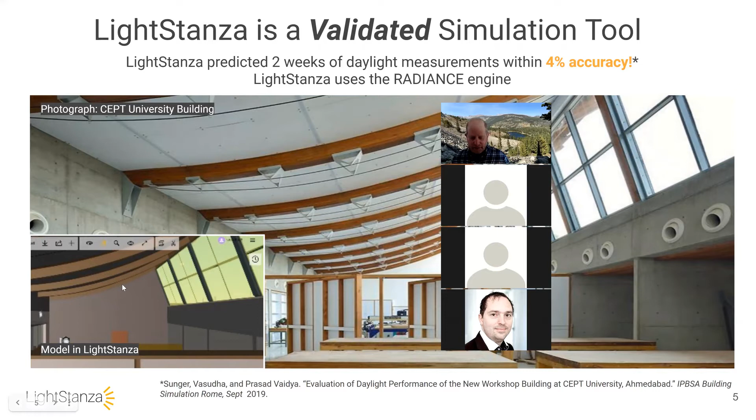I'll talk briefly about our daylight background. We use Radiance as our calculation engine, and we've had field studies to show it's very accurate. A university in India reviewed our software and modeled a building. They calculated the light levels, then built the building, and got within 4% accuracy.

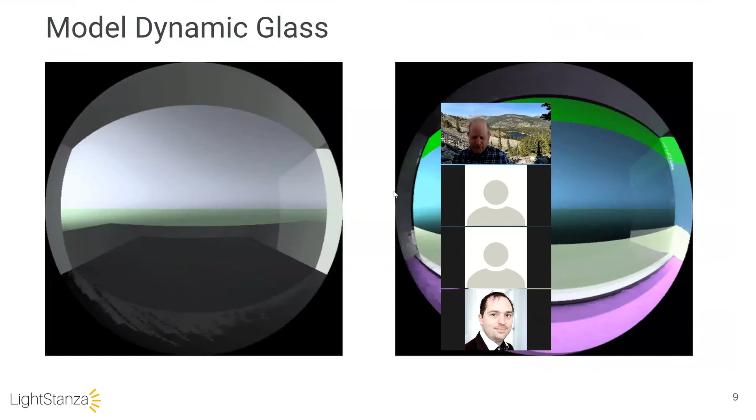In this case, you can actually look at how this glass can change colors depending on different factors of the sun. So we're interested in controls too, and this is what it would look like if you want to do a rendering for a client of the light levels.

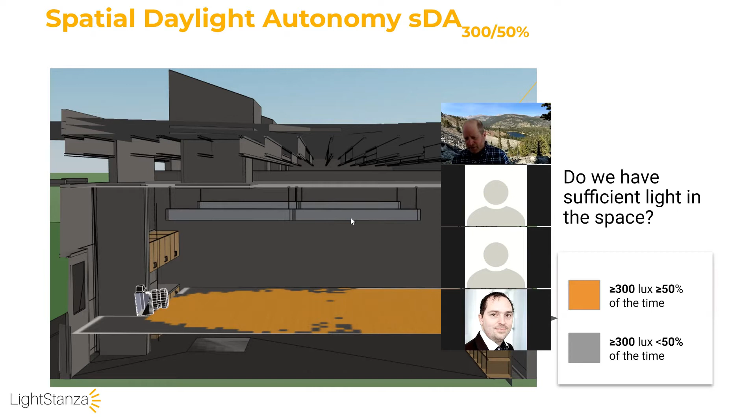We also do annual daylight calculations, which some of you may be asked for in your work. It's how much lighting can you get without the lights turned on, and that's something our software does really well. There's a European standard for this too.

Lastly, we have some things with glare, and what we use right now is daylight glare probability. We understand there are different glare metrics, and we're developing them for electric lighting, so you can really understand how painful or comfortable your environments are.

On the left is a window with just regular glass. On the right is some more cool dynamic glass. You can get plots and look at different configurations for glare.

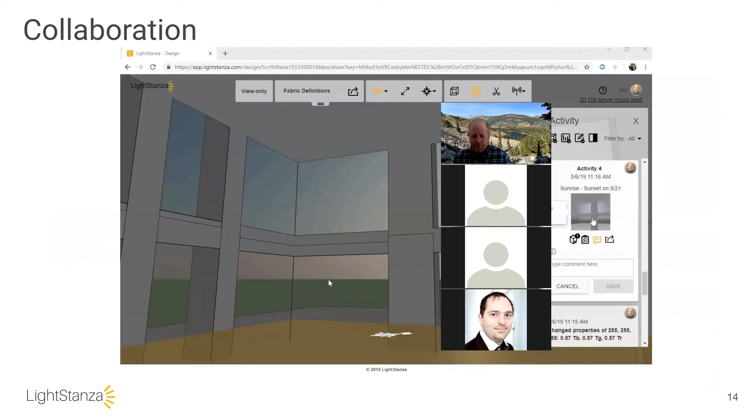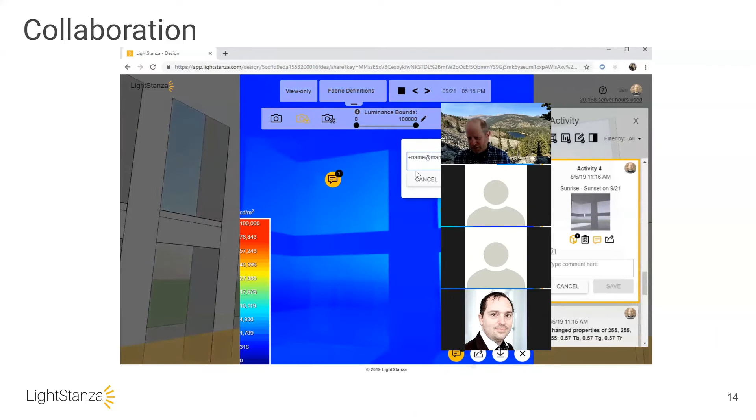Lastly, we do have some collaboration features, and I'll show you a bit about that so you can communicate either with each other or with us. To get technical support, you can just type in a message and we can get your technical message and write you back, seeing the context of it.

So I'm going to jump into our electrical product now. Are there any questions right now about the daylight? I just gave a brief overview to show you our background, and that we're really passionate about light and interested in the dynamic aspects of light. Any questions right now?

All right, from here I am going to talk about the electrical product. There are different ways to work with LightStanza. One way is to do your lighting layouts in Revit, and you can use LightStanza to run the calculations.

Also, you can do layouts online, and you can sync between the two. This is a really unique feature where if you're moving fixtures in Revit, you can have them move online and vice versa. Different people may have different preferences. Who here has used Revit or has clients that use Revit?

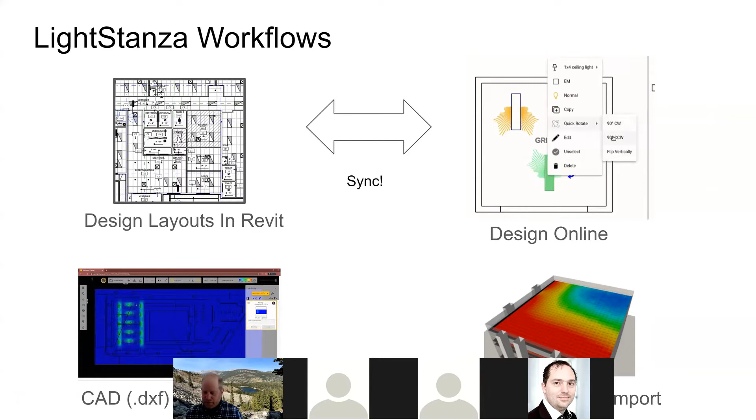Also, we work with traditional CAD workflows like DXF, as well as SketchUp and other formats. That being said, I'm going to go into the demonstration mode.

Lastly, if you're using Revit, you can do things we call prorating, where you could change your linear fixture and then have the software calculate the right photometrics for it automatically. So where do we want to start?

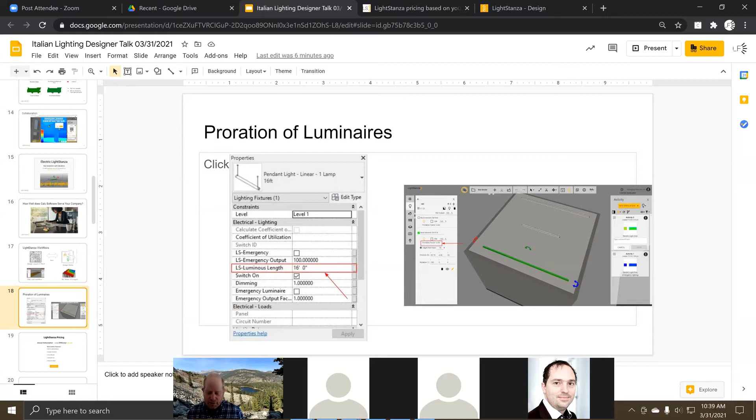Who here uses SketchUp or is interested in SketchUp? And how can LightStanza work with SketchUp? I'm just going to go over this example.

Of the folks here, are people interested in SketchUp, CAD, or Revit? Or I'll go over them all. Just speak out if you're interested in DXF, Revit, or this SketchUp workflow. It also works with Rhino.

The way LightStanza works is you want to send your model to LightStanza. This is just a regular SketchUp model with some windows in it. I also placed some calculation grids in SketchUp.

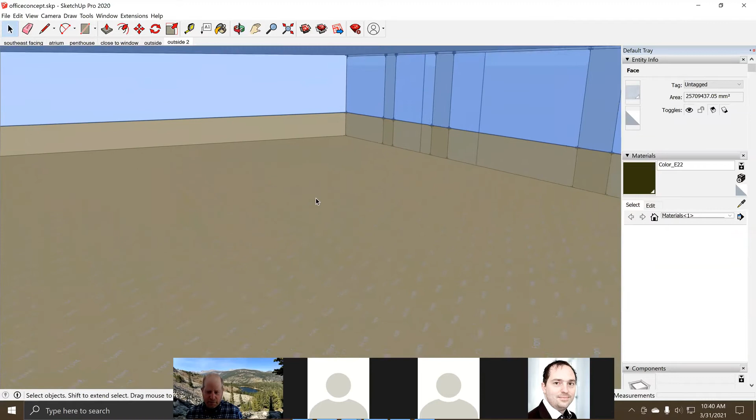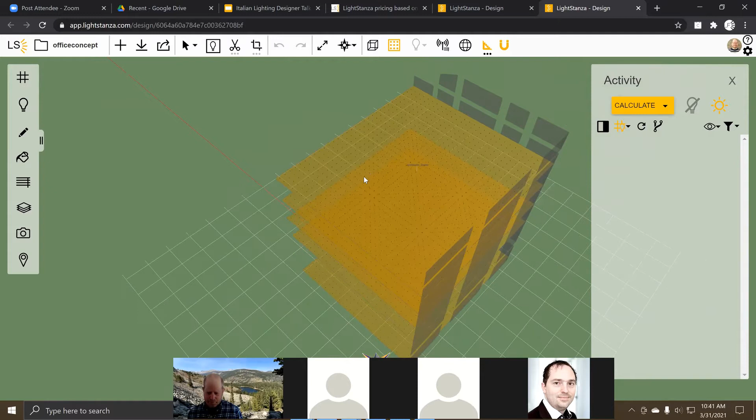To make these calculation grids, you just have to use a different material, and you can put them at whatever height you want, oriented in different ways. Once you upload it to LightStanza, you can see your model in 3D, along with the calculation grids you put in. You don't have to put them in SketchUp, but I had them here because they're handy.

Right away I can go into this plan mode. LightStanza uses some intelligence to understand that this is a 5-story building. I could go to one of these floor plans and even view it in 3D. If I wanted to, just to try the lighting, I could run a grid calculation at multiple times.

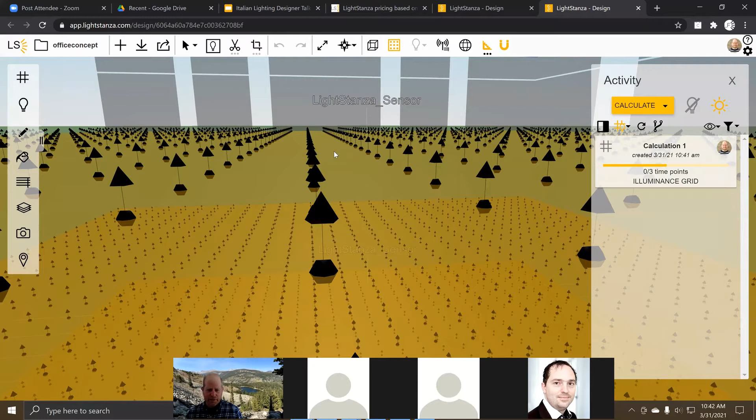There are no fixtures in here yet, but we're going to put some electrical fixtures in momentarily. I can also pull back out on this model and go outside the building, and we have a crop box we can use to make this model smaller if we wanted to.

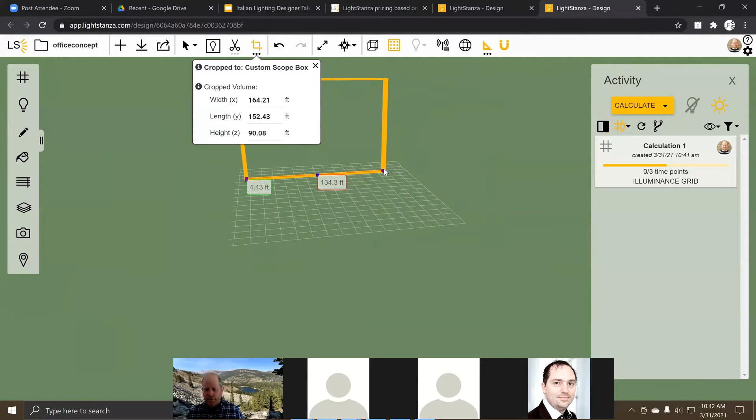So if I were to pull this out, I could turn on this crop box. And here we are - I can actually take this model. Let's say I just want to do lighting for one of the levels, so I could basically take this and collapse it down to just part of the building.

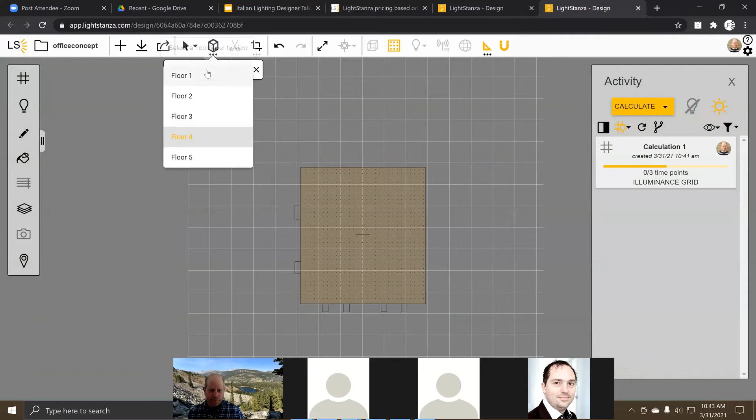Let's get the ceiling here - I want to go here. That's maybe good enough. Now if I go back here, I'm really just looking at one view of this model, and you can see the different floors and different things we're working on. But the idea is I could start doing a lighting layout in this model wherever I want.

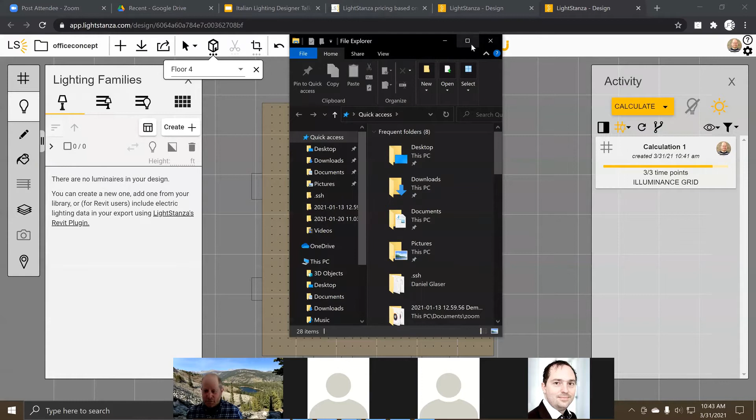To do lighting layouts, you can pick from a library and add fixtures to your library, or you can just start from scratch. If I have a folder, and I apologize, I had to reboot my computer, but if I just wanted to quickly look for some IES files, I can pick some of these - I'm just picking random IES files here - and drop them into my project here to start adding fixtures to my SketchUp model.

This isn't the right type of fixture, but you could see this in plan, and then see it over here. Let's just put on wireframe so we could see the fixtures. So this is sort of our SketchUp workflow, and you can actually start adding fixtures anywhere you want in your model.

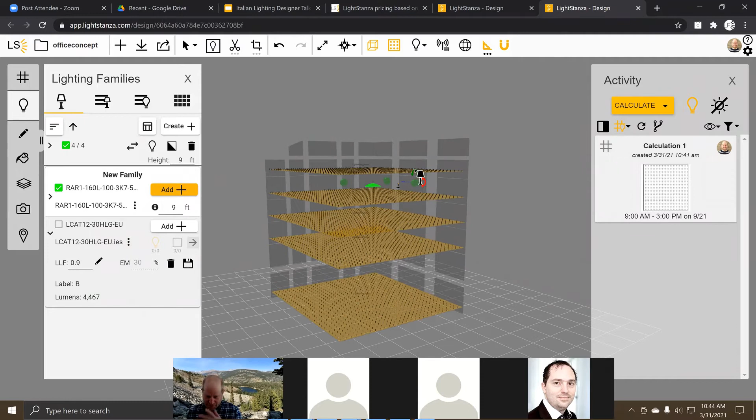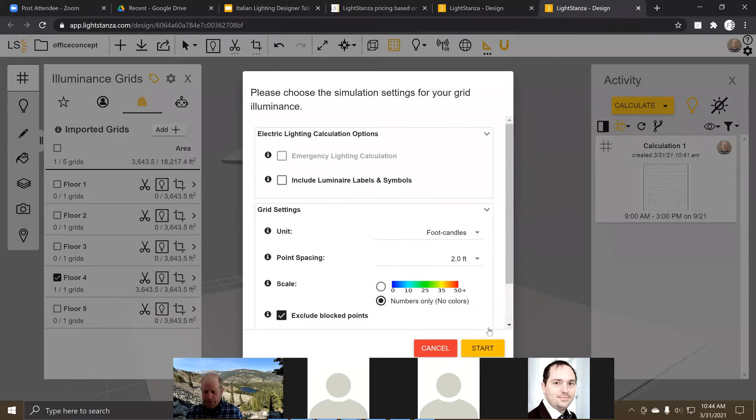If I wanted to look at the grids, the calculation grids, I can disable them all and turn this calculation grid on. Then if I run a calculation here, it's going to run it for this grid. I've also run this calculation for daylight, and you could see different results for the daylight calculation.

So once you add in a light fixture, you get the electrical part here, but if you wanted to see the sun, you can just turn it on this way. And if I wanted to do another calculation with the sun, I could just do a single point in time - maybe not multiple points - and run this. I just wanted to pause for questions right now. And yeah, these are being run in the cloud, so it's not bogging down your computer.

So these calculations, if you were working, you can come back. And if you had a question, you could say you don't think the calculation was accurate, and you could tag us at support, or it could just be like, Michael, do you think we need to add more luminaires? This is the collaboration aspect - you'll get an email, and you don't actually need a copy of LightStanza to read it.

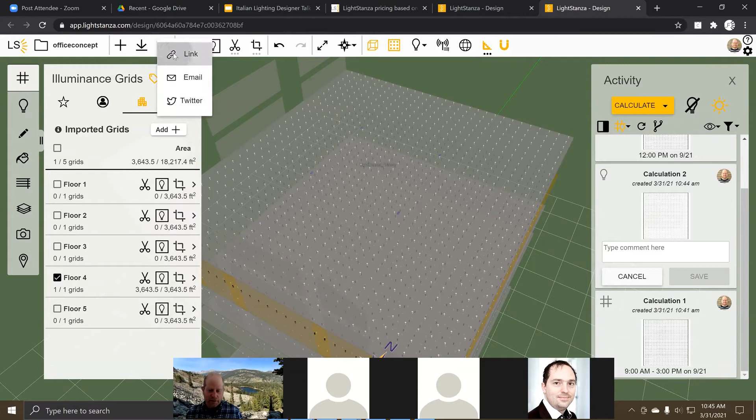For example, I'm going to give a hyperlink to this model - let me open the chat window here. I just put in the chat a hyperlink, and folks that would like to take a second to look at it, you're able to come into this drawing and see the analysis.

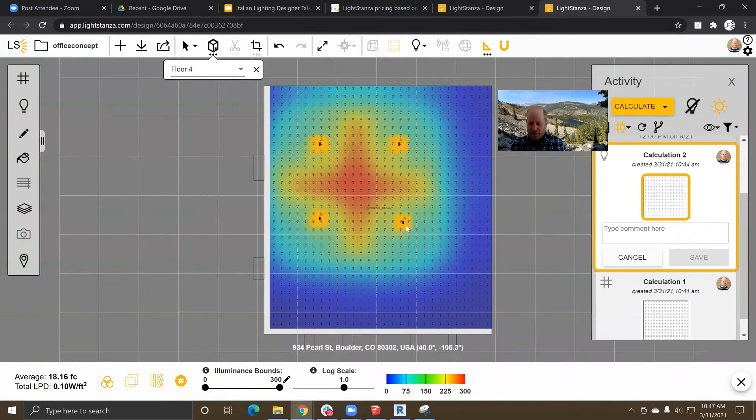This is a daylight calculation, and this is an electric light calculation. Again, this was sort of a silly example - I was just trying to show you how you could put fixtures in a SketchUp model. Then we're going to move on to Revit and some other workflows.

So this would be a case where I could just call this initial layout, and then I could type something here if I wanted to tag a colleague. Likewise, I could just share the entire drawing with someone else who doesn't need LightStanza, and the hyperlink on the chat channel you should be able to get to. So, any questions? I'm going to pause for a second.

Michael, do you have any questions right now about the SketchUp workflow and how we're able to send the model? It's a free plugin to SketchUp to just basically send the geometry over here, and then you can kind of work with it.

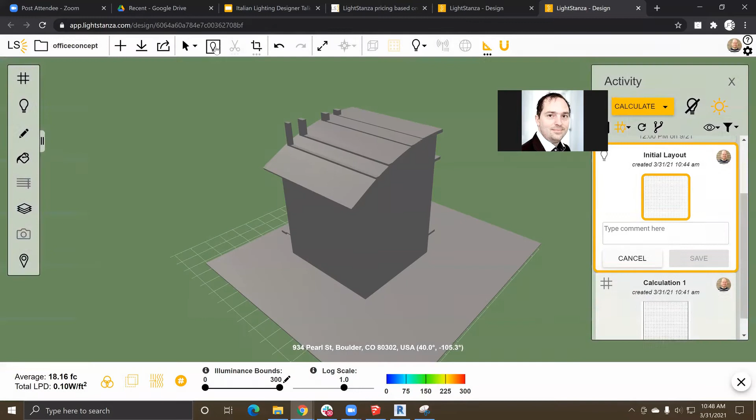I haven't seen the SketchUp workflow so far - you showed me last time something about how it works with Revit, which is similar. So it doesn't need someone to have SketchUp to work with a SketchUp model, and I can send it even to another third party to verify if I've done it correctly. And none of them need to have the SketchUp software on the computer because it's all web-based, correct?

Exactly. So this is the SketchUp model converted to LightStanza. And if you wanted to change some of the materials, you actually can here.

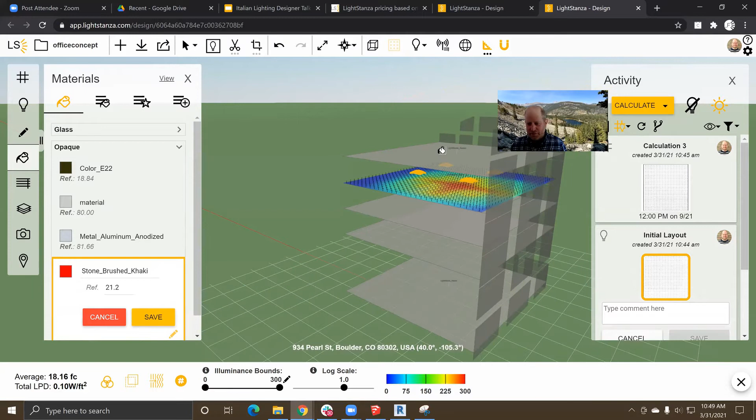So if I wanted to pick one of these materials, I can go ahead and paint it. This material is hard to see - let's find something brighter, make it bright red. Now if we go here, I think... okay, so you can do some alteration of the model where... okay, there it is - so this is the red paint. But yeah, that's the idea.

I'm just going over SketchUp. Are there any other questions about this? Otherwise I can move into Revit and show some other workflows.

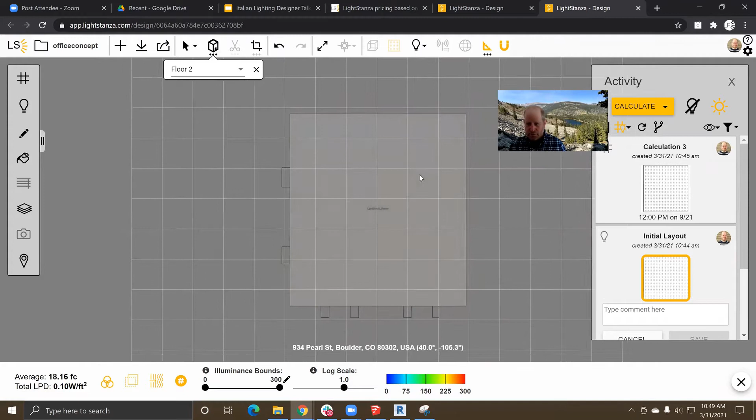I'd like to look into Revit because I think that's something which is going to be exceedingly important for us.

Okay, so here's a school in Revit, and this was done here in Colorado. This school has an initial electrical layout, but they don't have any photometrics assigned in Revit.

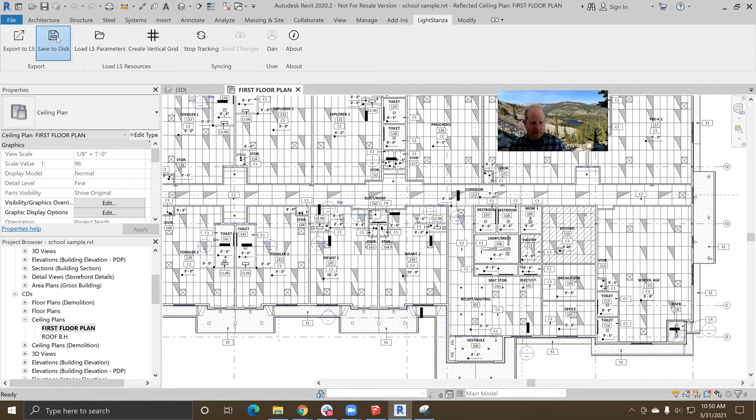So what you can do is go ahead and go to LightStanza - this is our free plugin. So if you're a lighting designer working with an architect or an engineer, and the engineer has their plan, they could either save it to disk into the LightStanza format, and you don't need a copy of Revit.

So I can save this file directly, and use the photometrics that are applied in Revit. If people have a light loss factor in Revit, you can use it, or you don't have to - you can just start with the defaults.

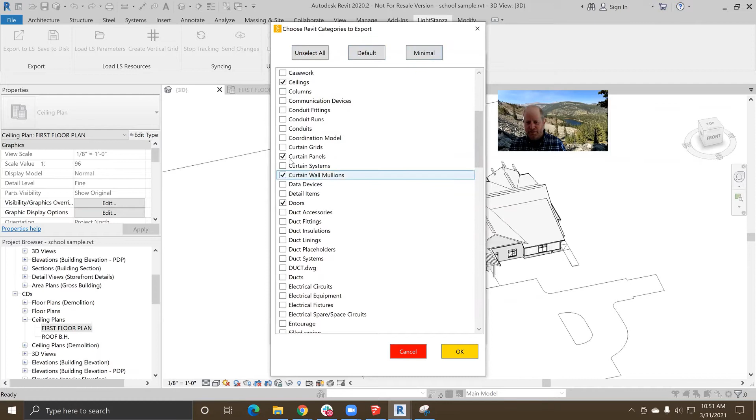You can also filter these models, because Revit models, as people know, are really filled with stuff. So you can pick the different things, select them manually after you do the upload. You can export a whole model, or if you want to make it quick, you could say I just want to do the lighting for this one space - this is like a kindergarten school. So you could pick one individual space, but I'll do the whole model.

So if I were to save this, it'll basically save it to a file. If this was an engineer you're working with, it'll save into a LightStanza data file. You could say school sample, whatever it is, and save it. Then the engineer could hand this to you, and you don't need to work with DXF or DWG. Are there questions about that?

This is one workflow. If you don't have Revit, you would ask the person with Revit to export and give it to you in LightStanza format, which is free. Are there questions about that?

If you have Revit, the more typical way would be that you export to LightStanza. You can include the electrical work or not. If you don't need it because you're doing a daylight calculation, or if you're doing all the electrical work in LightStanza, you don't need it. But otherwise we could use this. Again, you have the same options.

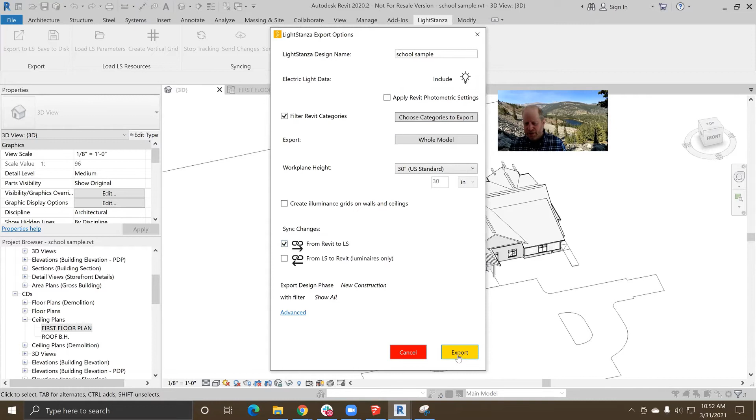And then you have this option to sync between Revit and LightStanza, so the two can talk to each other dynamically. So if I hit export here, it's now going to convert it and send the drawing to LightStanza online. This is where you can get cloud computing as well as collaboration aspects. And you can see here, it's sending it to LightStanza online.

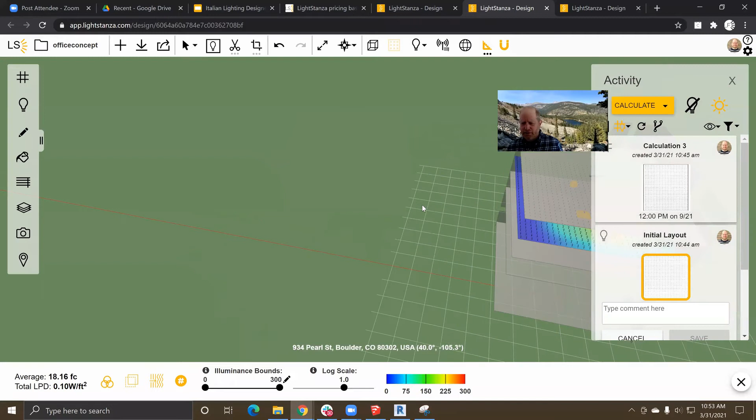Since it's web-based, you could still work on your other project while this is uploading, because you can make multiple windows of your work and work on different things at once. In fact, I could even open up a simple sketch pad of some ideas, just to show you the flexibility while this Revit workflow is running. Hopefully I'm not losing you, but the idea is that it's web-based, and you can have many copies running at once.

I can go ahead and start on some other lighting concept from scratch, or I could import a DXF or a PDF, and you can start running calculations. You can go to lighting layouts, pick different types of fixtures, and run calculations.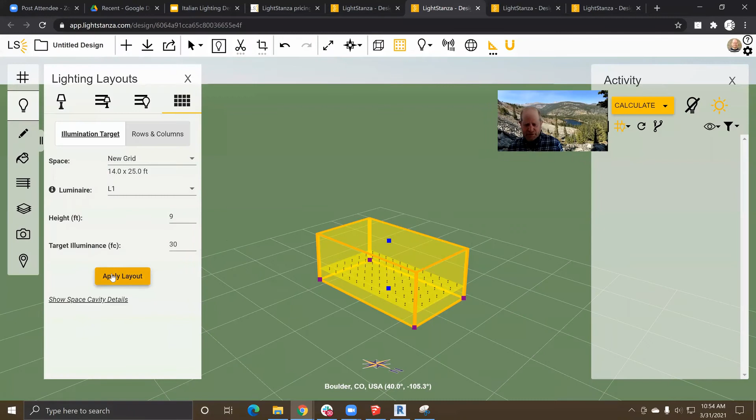Hopefully I'm not confusing you too much, but I'm just trying to show that you can work. You don't have to be held down by your lighting program per se. Are there questions about this? Michael, am I going too quickly? I was just trying to show that you can continue to work on other projects since it's web-based. Well, I knew that already, so I'm fine with that. But if anyone else has a question, feel free.

I can also ask the people in Italian. Let's see, that's going to change something.

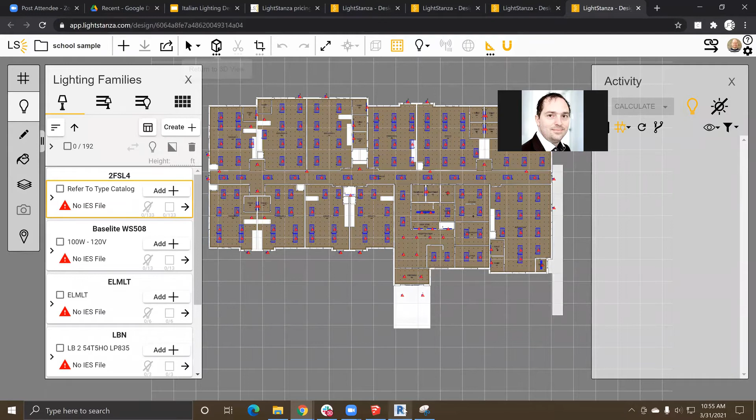Well, there seems to be no question at the moment. Okay.

So this is just a copy of the Revit model that's online. People like to have this copy because it shows a lighting designer what in Revit's actually being calculated.

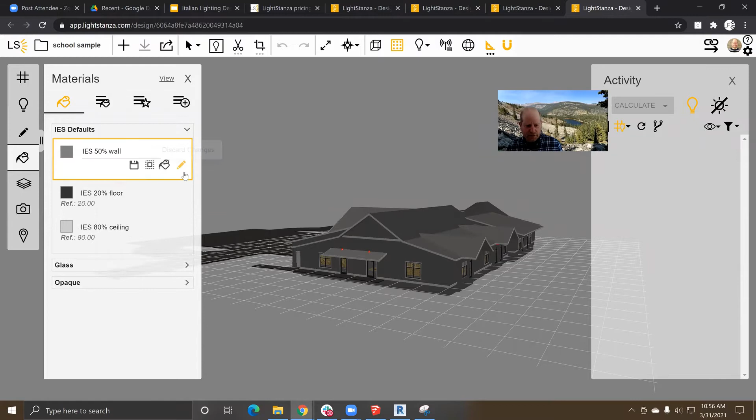We have some defaults for the materials. For example, we'll try to import all the walls at 50%, just to normalize the model so that it gets cleaned up. You can change this percentage from 50 to a different percentage if you had a different wall reflectance.

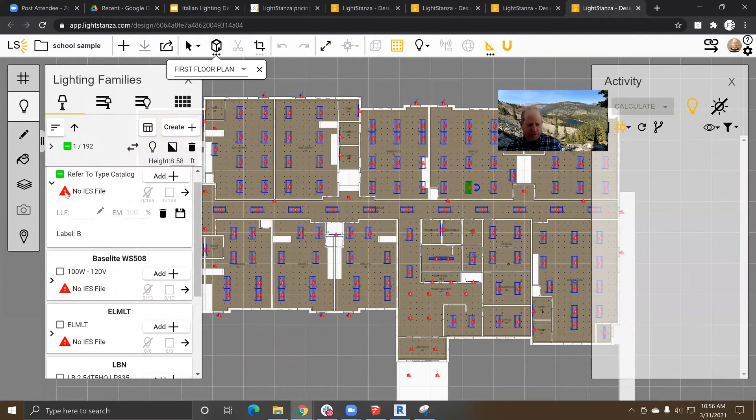Back in this view, as I said, in this case the architect put in some fixtures here, but they didn't apply any IES files or photometrics. So Lightstanza is prompting you to add a photometric file, and you can upload it.

You could use a library. Let's see what I have. Again, I apologize because I'm just picking sort of random files. I'm not really thinking this through.

And then this applies the IES files. So you could have added it to the fixture here in Revit, and it would have uploaded it to Lightstanza, or you could do it in Lightstanza.

And let's say you just want to look at a particular space, you could still use this crop tool. And I can go ahead and run a calculation.

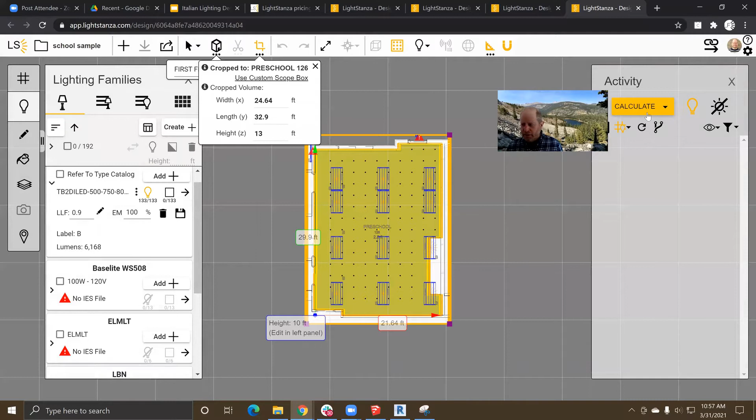The other interesting thing about Lightstanza is people will want to either do their layouts in Lightstanza or they'll want to do them in Revit.

For example, I could move these around and change them. Or I could also do something like that here in Revit, where I can go ahead and, let's say, move this fixture in Revit or delete it.

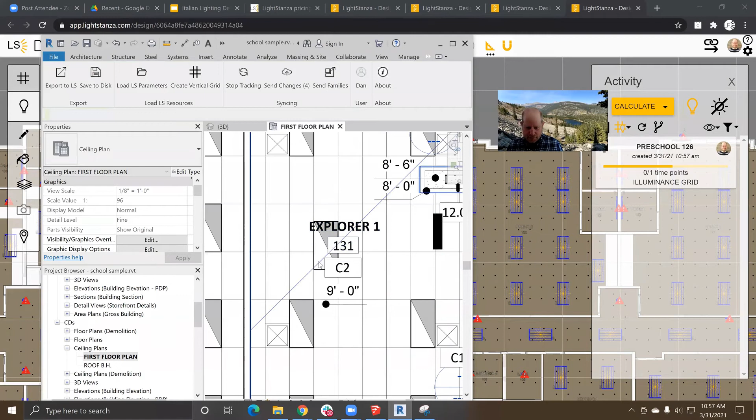So if I were to move this fixture, and let's say I were to delete this fixture, okay, so I'm editing these fixtures, and let's say I'm moving these around. What I could do is if I go back to this Lightstanza tab here, I could send my changes, and it will just send those 4 changes. And then what happens online is we should see these things move, and you could see them over here.

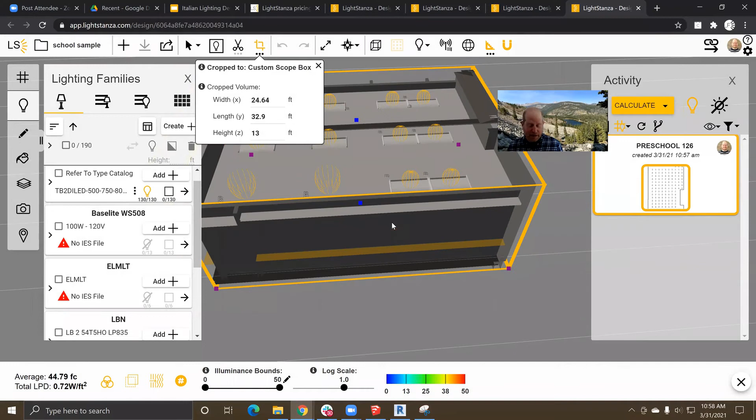So see how these fixtures moved? Are there questions about that? So this is one way of working in Lightstanza where you can change your fixture layout in Revit and have it update in Lightstanza. And then you don't have to re-upload the entire model.

So that's what I was showing here, that I moved these fixtures, and you can just send the changes, or you don't have to send the changes, but when you're ready, you can just send them again, and then that fixture will move again. So are there questions about that? So here you can see the fixture went back. This is the result of the other one here. There's a lot of light here.

And if you wanted to, you could send information back into Revit. And so if I were to look at this report, I can actually send some information back into Revit. So for example, Lightstanza could send the schedule information back into Revit. And so I can hit this OK. It's sending back both the fixture schedule, what we see here, as well as this calculation schedule.

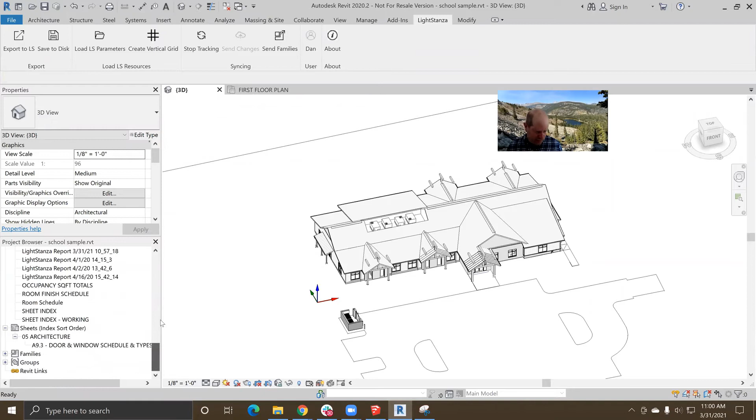And then inside of Revit, you can see that we have these different reports that are being populated inside this model in Revit that came from Lightstanza. So that's one primary way that people can use Lightstanza, is they can send information back that way. And likewise, you can do fixture layouts in Lightstanza. Are there questions so far about what I just showed?

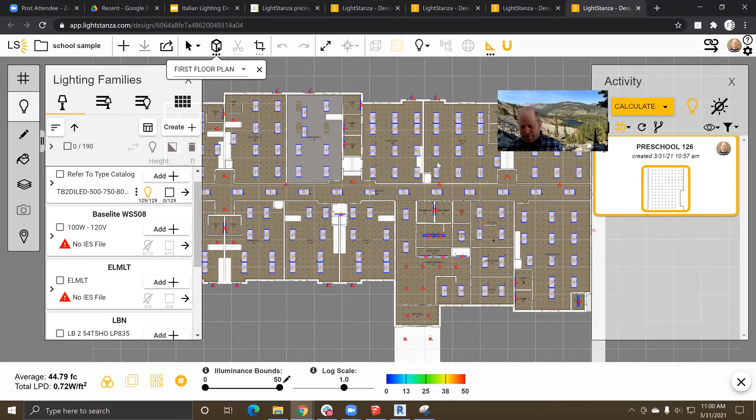Just that one, you can import Revit models. And the other thing is you can make changes in Revit, send them to Lightstanza. And what I'll show next is how you can work in Lightstanza, which I think many of you may want to do. Are there questions right now?

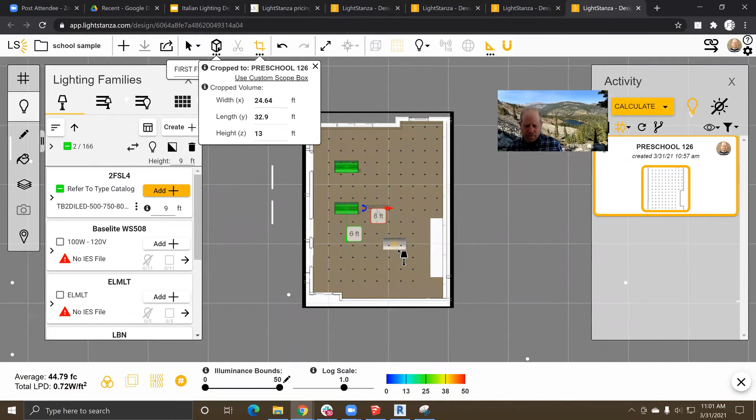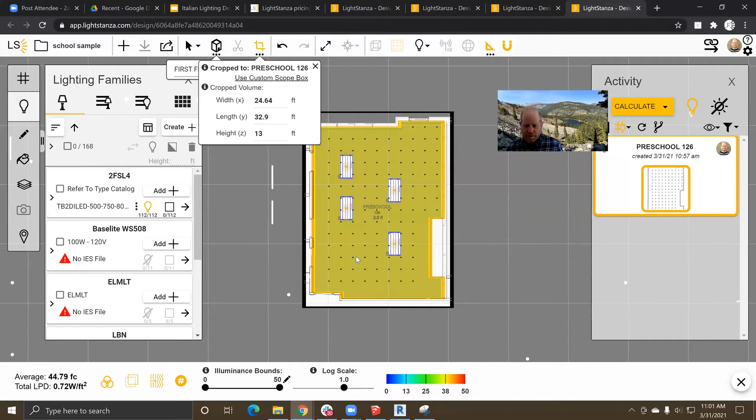Okay. So the other thing you could do is, if you don't have Revit and you get a Revit model, you could just do your fixture layout right in Lightstanza. And so here, you can just go ahead and do a regular layout too. And if you like, you can rotate these. So you can also do your calculations in Lightstanza, and I can crop to this space, or it is cropped here, and you can run a calculation with no luminaires from Revit, just from Lightstanza.

So generally, people will work in Revit for the layouts, or they'll work in Lightstanza. They typically won't do both, which is what I'm demonstrating now. You typically won't want to do your editing in both places, because it can lead to some synchronization issues. So are there questions about this Revit workflow so far?

With Revit, you can just import the file directly, you get all the 3D geometry, and in this Revit model, you have all the spaces that the architect set up to run calculations on. And if you wanted to make your own grid, you can do it inside Lightstanza. You can make your own grids online too. And if you don't like this grid, you can make it inactive. And then you can just work with this other grid here. Are there questions about this?

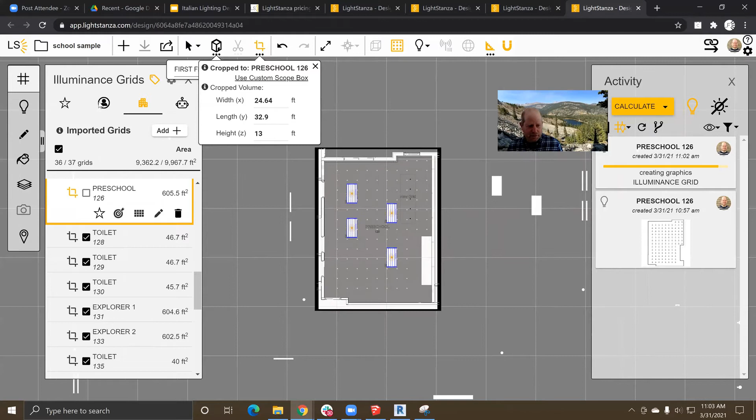I think it is new. So to me, there are many new things, and to the others there are probably even more new things. So it's quite impressive how things are moving forward. And I received a message through another channel from someone for you as information. Just go ahead. It seems to be of interest.

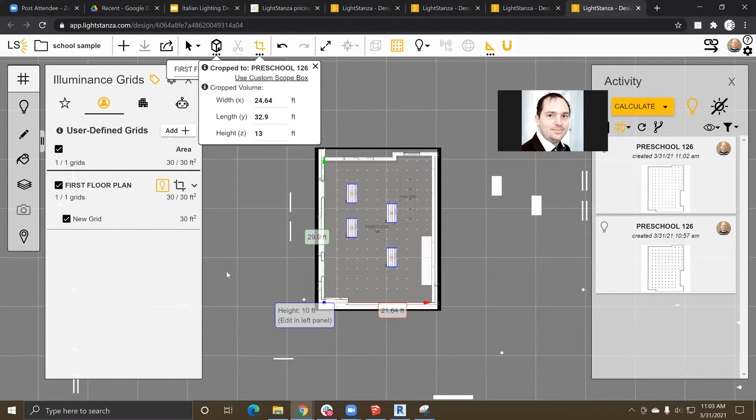Okay. Good. So, yeah, just allow the people to look at it, because sometimes it needs time just to look and understand, because there are so many icons. Probably you can give us a quick overview of the different icons, what they mean, because then it's becoming much easier to understand what the possibilities are that you have. Because they are totally different to what people know from DIALux and Relux that are more common in our region. Okay. Sorry. So yeah, thank you for that question.

So we have these different toolbars, and we'll start from the beginning here. Maybe we'll start in 3D here again. So on top, when you work in Lightstanza, you are part of a team, and your team may just be one person, or it could be many. So one thing you can do is you can go out and see all your projects. And so this is different, I think, than DIALux and Relux, in that you have a shared workspace with your company. And our pricing is actually by company, not by users.

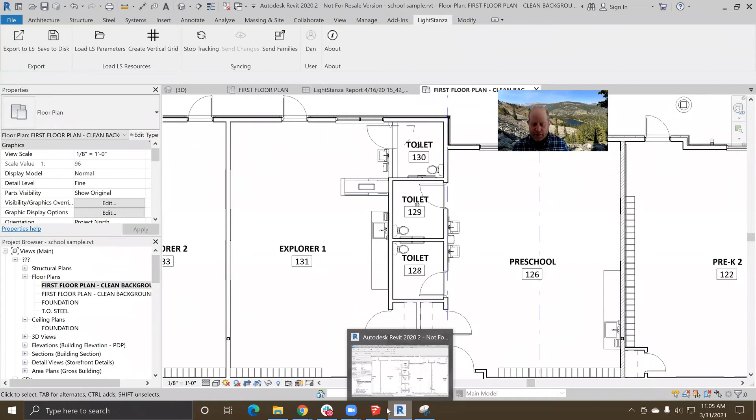So the idea is that you have many different projects you could be working on. When you start in Revit or in SketchUp, this is just a Revit drawing, you'll go directly into your design, just like with SketchUp. But you will log in first. So even before this, you're going to log in to get to your company account. And when you log in, you can make something from scratch right away. You can make even a lighting box right away. And so this is different, I think, just because it's web-based and we're holding the storage for you.

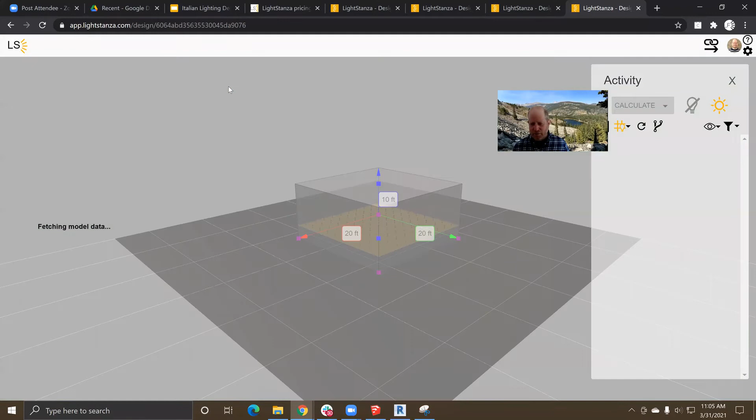And you can go ahead and do different things and run these calculations. And so this will probably be one of the biggest differences with your other software, is that we have all your storage online. And then in addition, all the calculations are being run in the cloud. And so your laptop or your workstation won't have to worry about the calculations. And this is where you can see all your work. And you can also see other people on your team running calculations.

If I go back to the home folder, I'll have different people running things, and we even have anonymous people commenting on things. And so these are the different calculations. And then you have this folder system that you could move your files around, and you can make folders. It's up to you how you want to organize it, but everyone in your company will have a Revit export folder, just so that you can export your drawings in different locations, but then you can make them any way you want. So that's just the first thing that will probably be different than your software.

And then when you go into one of these calculations or designs, we get into this editing mode. And on top here, this is the overall toolbar, and this is just your project name. And this is just a way of making something quick and easy, a new little project. That's what this plus button is. And then we have a share link. And again, this is going to be different than other software because you can share your work with other people.

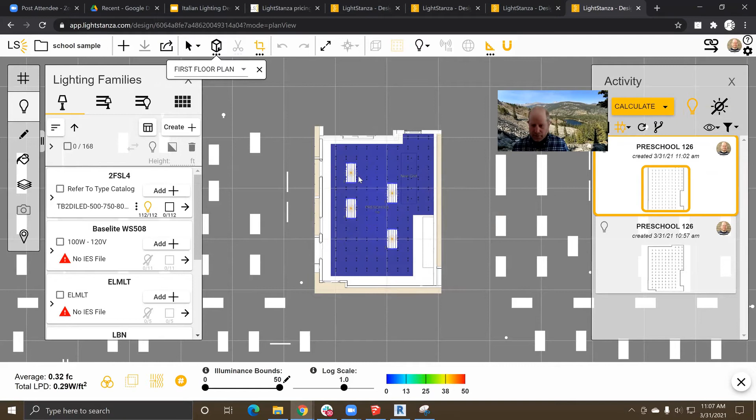And I'm going to try again to get the chat window open. The chat window seems to be hidden from me in Zoom, darn Zoom. Yeah, I am having difficulty with the chat window, but I think I'll get this later.

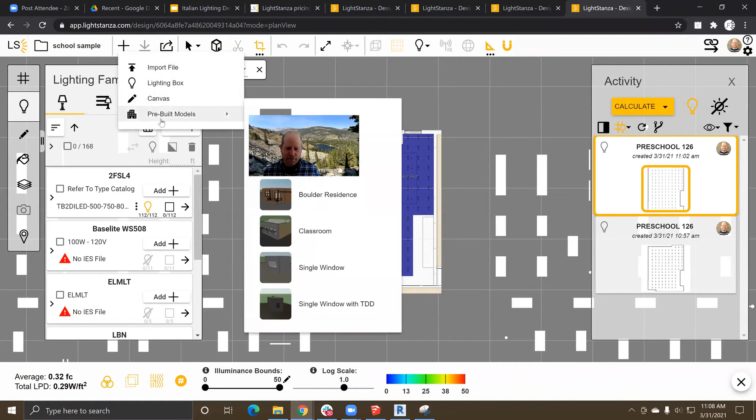But the idea is you can share this, and it's collaborative since it's all online. And then this plus button is just if you wanted to quickly make something else. And this is sort of the way that you can multitask. You can quickly start another design real quick. And this is just sort of the navigation. It's probably similar to some tools that you use, but you can review this, and this will show you how you navigate around Lightstanza.

This is an important button for lighting designers: this is the 2D and 3D mode. And we have some intelligence where if your Revit model is 5 floors, you can toggle between the floor that you want to work on. So instead of having to work with 5 different files, you can just keep them all together. And likewise, if it's a SketchUp model or a Rhino model, it'll be the same. And then these are just some tools to crop and uncrop.

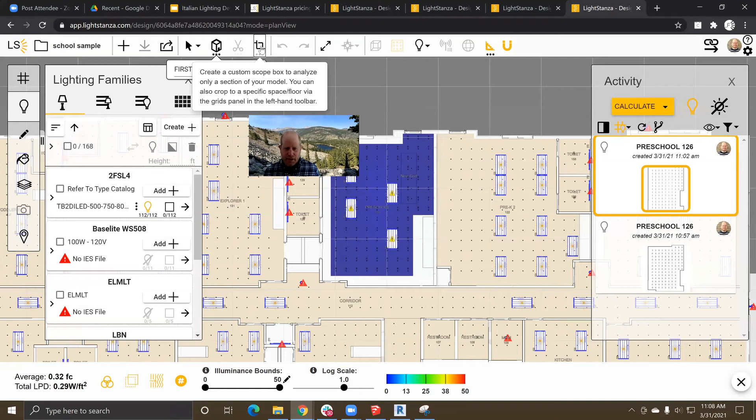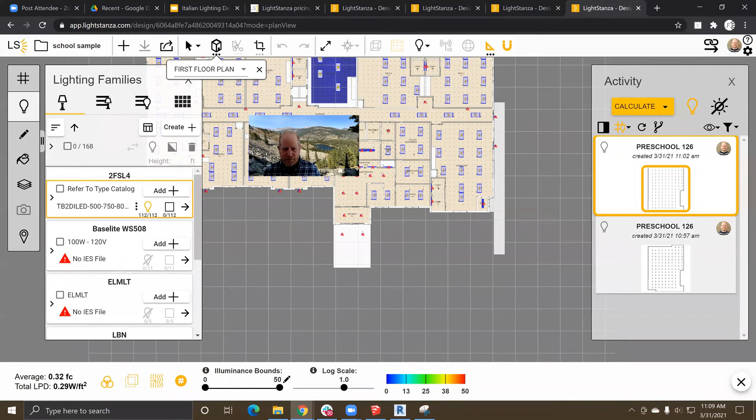Just a section box here. And this is just undo and redo. And this is just how you view the model. And you can also turn off the photometric webs. So if you want it to run maybe quicker, you can turn off the photometric webs that are on here in 2D, and you can also see them in 3D.

And in 3D, you have other graphical options like looking at this in wireframe mode. And those red symbols are saying that you have a fixture that doesn't have IES data on it. And there's also labels for the fixtures. Each fixture here on the left has a label name. So in this case, this is label B, and you'll be able to see that if you want it on.

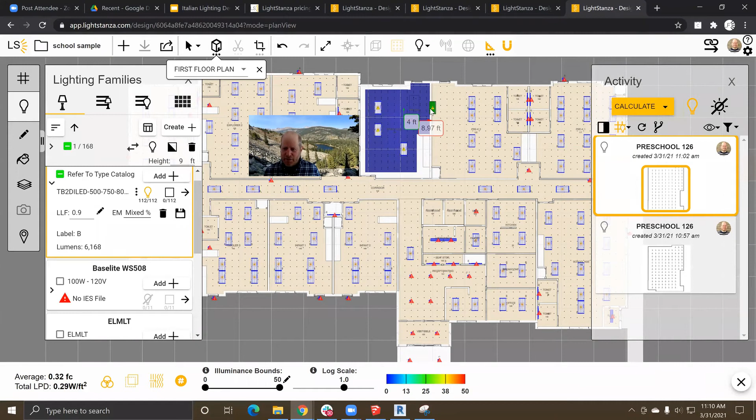And then this is just a way of showing a white background if this is a daylight calculation. So these are just more rendering things, but over here are some alignment grid tools. If I was working here in two dimensions, I would potentially use this to have my fixtures snap on things. And so if I were to move this around, it should start snapping on things, as you can see. We can also turn it off so it doesn't snap.

And then this alignment grid is just to help you figure out the spacing. It will be in metric too, if you want that, that's in your user preferences. And so this is where this grid can come into play here, and you can just change that to help you with alignment. And you do have user settings over here. And what's unique about Lightstanza is you can invite other people from your company to your team, and they'll have access to Lightstanza too.

And you can change your units. I apologize, I'm using foot candles in the United States, but you would be using this, so it'll look more normal. Actually, I can keep these on for now, so maybe the new stuff that I do will be in units that you get.

And then also we make updates really frequently. Another nice thing about Lightstanza is you can see version notes, and you can see all the different updates we're doing at the company, and we'd like to think we're responsive to the folks there.

That's this top toolbar, and this is telling us that we're synced to Revit. So this drawing is synced to Revit, and we can send information both ways between the two. If I hit this to go back, it's going to send the fixtures back in the new location. So you can see how interesting this can get, that you can put luminaires either in Revit or in Lightstanza and send it back. Are there questions about this top toolbar?

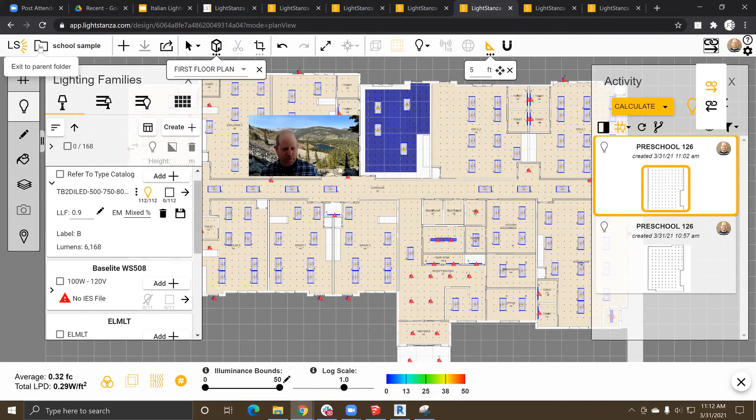And yes, I'm sure this is very different than the tools that you're using, but we're trying to keep this a simple tool. I understand that you have expertise in other tools, so everything is going to require some learning, but we've spent, we think, a fair amount of time on just trying to make this simple. And then I'll continue on these other bars.

So once again, this bar over here is just keeping track of your calculation results, and you can click on different results to get different information. So that's what these things are doing here. I just clicked on this, and I'm getting some different information from it. And this is a history of what it's doing.

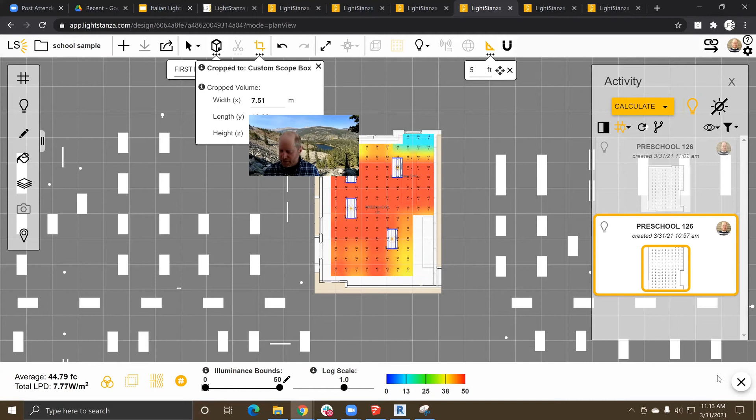And at the bottom, these are sort of the simulation outputs, the calculation outputs, and you can change some different things with the outputs if you want. You can take out the numbers, and you can change the illuminance bounds and things like that down here. And then if you don't want to see this calculation, I can go ahead and close it. So there it is.

And then this over here is telling you about all the calculation grids in your model. So these are grids that you drew. If I were to make my own grid, I can make different types of grids, and as I'm selecting it, it makes a new grid and adds it into this panel. So these are these two grids here, and if I want, I can rename them. I could just go ahead and edit it. I could say area of interest, and if I wanted to, I could change the height of it.

So here, the grid height, you can change here. And let me cancel this. And you also have the grids that are brought in from Revit. And so these are the Revit grids that came in. And these are done by typically the engineer or architect, and these would be rooms or spaces defined in their Revit model. And so it just helps you not have to redraw them by having this.

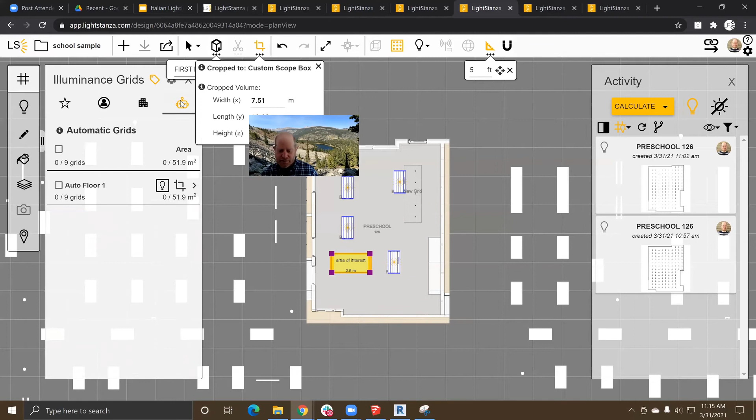And then we have this sort of automatic grid that we try to guess them. They'll be much more useful for SketchUp models and Rhino models. And then if you like a grid, you can go ahead and favorite it, so it makes it accessible. And then you could just work on this one grid that you really care about, and I could crop into here and try to understand it. So that's what the grid calculation is for.

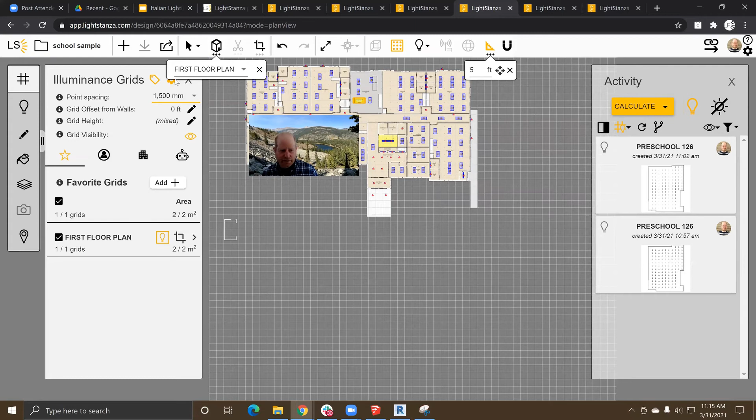You can change the spacing of the grid. Right now, it's limited to your entire model having the same spacing. You can change the offset from the wall, you can change the grid height, etc. And then you have tags. The names you can hide, and that's what this tag is for here. So I'm now hiding the name of these calculation grids. So yeah, this is the grids here.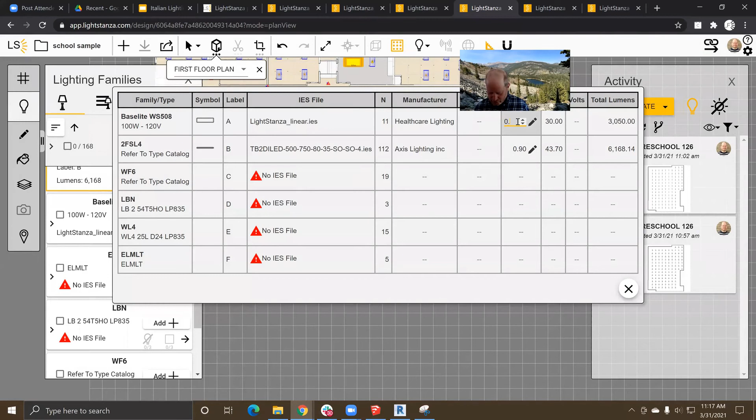And you also have a schedule of fixtures you could see this way. And you could go ahead and change things here also if you wanted to change some of the fixture data. If I wanted to change this, I could do it here in my schedule. And I can also do it over here where I can expand this and see like light loss factor, EM, etc.

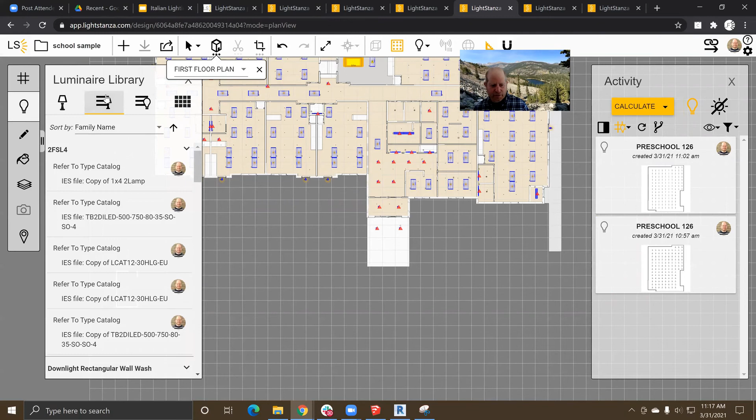And then, if this is a fixture I use a lot and I like it, I could save it to a library. And this library will be accessible to anyone on your team. So if I go to my library, see my luminaires, I'll be able to share these with my colleagues and I can add them on any drawing, if it's Revit, DXF, or SketchUp or anything else. And so this is like a shared library that you can use.

And then you can also upload IES files. And these can also be shared.

And then for the lighting layouts, you can just pick a space and do a layout. That's what this tab is for. So the idea is I could pick this, I could do a lighting layout, and then I can fill in, for example, the different type of fixture I want to use. And I could just pick its mounting height and apply the layout, etc. So this just put in those fixtures here. And if I don't like them, I can always go over here and delete.

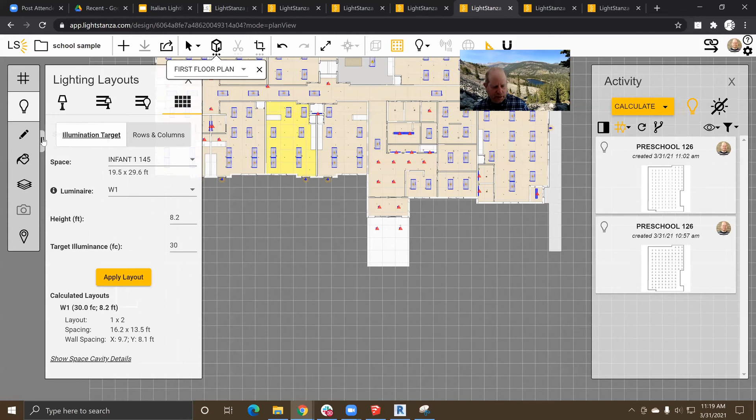So I'm sure you'll be spending a lot of time in this tab. This is the tab where you can draw things or import images. And if you have a Revit model, you probably won't use this, but occasionally if there's a hole or a problem, you can just add things quickly to the model. If you wanted to do some exterior lighting or something, you can just put shapes outside and work with that too.

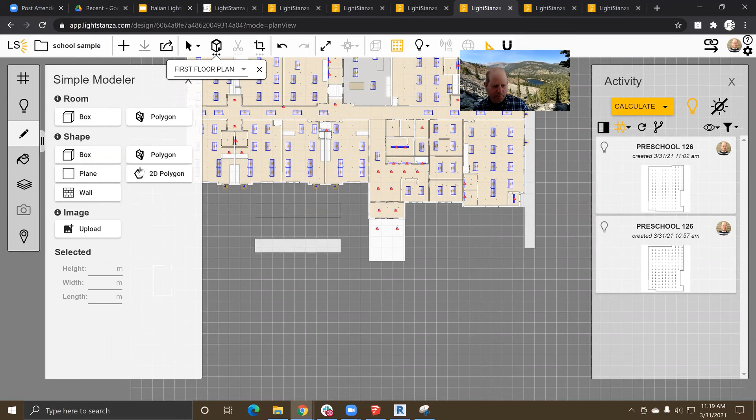And then this is the materials tab. Typically you'll maybe just change your reflectance value of the material, or you can apply it directly. And so that's what you want to do with the materials.

And then we have this layers tab. These have the different layers from the families from Revit, but also if this was a DXF import or a PDF import, you would have layers for your fixtures versus your geometry. And then this is just a site tab for it.

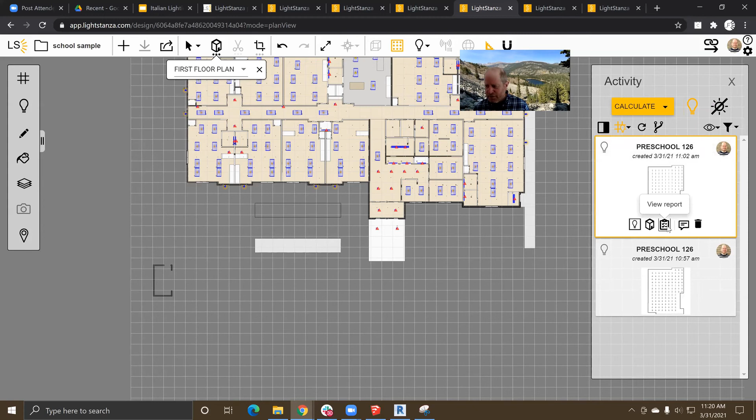So this is a report that you can get after you run a calculation, and it gives you a schedule of what was run and it gives you some calculations. Right now, we really just have a daylight report.

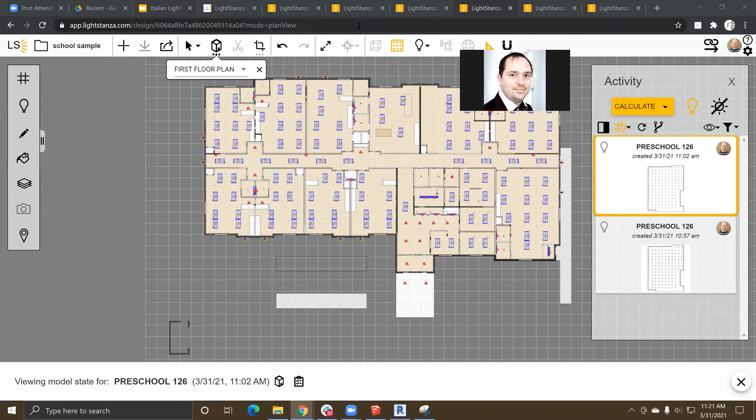You mentioned, which is correct, that the report side is not complete yet, and I think no one is happy with all the reports from the different other types of software. Do you think there will be in the future a way to make the report adapted to the user's needs, so that you have a standard report, and if I as an office come to you and say, can I have a special customized report, is that something that could be made possible?

Yeah, so right now, how are you reacting on clients' requests? Oh, for sure, for sure. So just real basic, this is also done with your current software, is that you can customize this thing, and we...

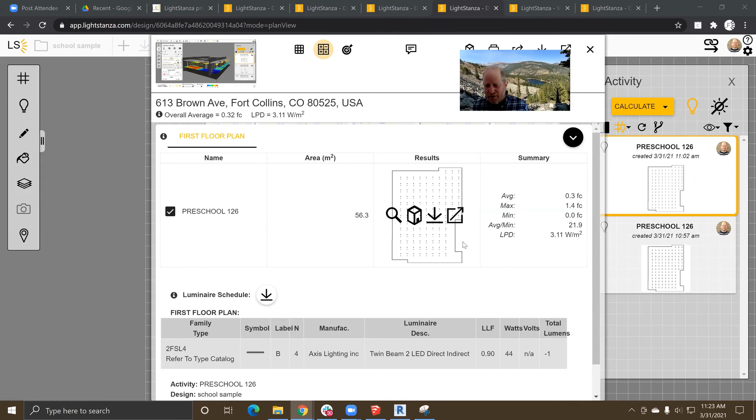Did that answer your question, Michael, or just about our workflow? And we'd be happy to work with someone here who has strong thoughts about their reports, and we have a plan for it. We're very participatory, and we want to hear from users about what their needs are.

Yeah, that's something that I contacted you about, telling you that I have seen your software and I seem to like it, and I'd like to know more about it. And I spoke to other people, and you were quickly saying, okay, I'll be showing it to the other people as well. And that's probably where it starts, to show that you are open to help people out, because not every software manufacturer is running a hotline, even less a hotline that can help.

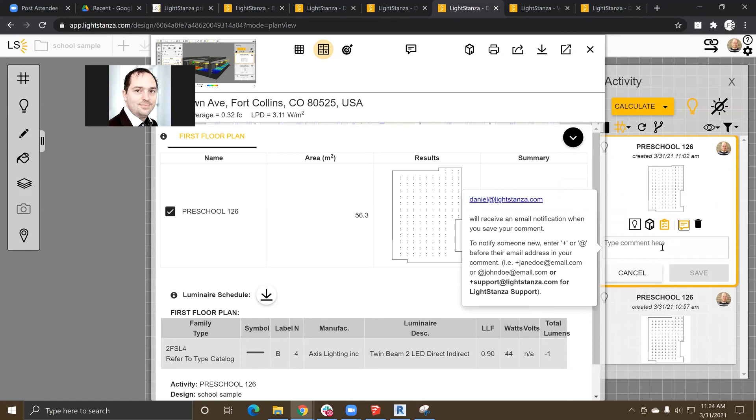And so far, as an intensive user of software, if I'm telling you I've got difficulty here, or we need this, or we need that, or why is this not working, either am I too dumb, or is it impossible to do this? Then you either have no reactions, like with emergency lighting. There are people asking for emergency lighting for at least 8 years in a certain software, and it has been promised that it would be there within 1 year. So they're now 7.5 years behind, which is something really typical with software companies. I don't blame them, it happens.

How do you handle things? How fast is your development if someone says, I need it, it's urgent, and if not only one person but 10 people are asking you?

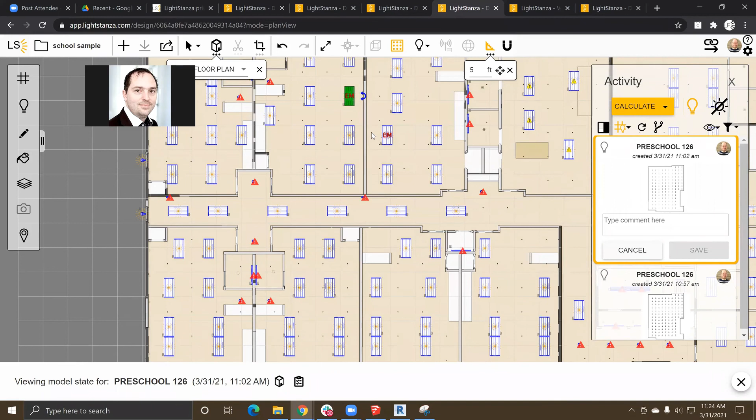Yeah, I think we're pretty responsive. We have a roadmap, and I was just showing you how you can turn these into emergency lights. But as I said, because we do updates so frequently, I don't know how often the software you guys use does updates. If you look at the version notes, it shows that we are very responsive to people, we make changes really rapidly. In this case, it's almost every week we're making updates.

So I think in this area of reporting, we're very interested in hearing feedback. We're generally responsive to our customers, and our philosophy is, for selfish reasons, we want customers not to have problems because we want our software to be high quality. If someone has a complaint, we don't want a second person to have the same complaint, because it just means more work for us. So we want to address problems as soon as we can.

With this feature, if you type in support, you could say 'why is this happening' and we'll see this email right away. We don't want this to be a problem for other users.

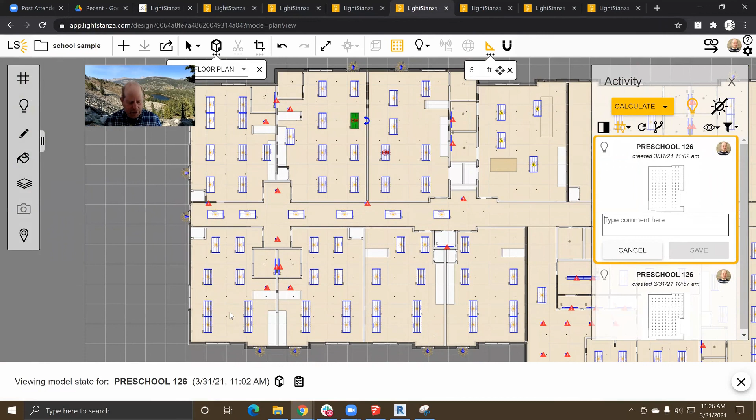Everyone at your company can be logged in at once to Lightstanza. Everyone could be doing layouts, running calculations, but you'll just have one of these calculation engines - one server devoted to your company. Our business model is, if you start using it a lot, you'll probably want to buy more calculation engines, but for most people, one calculation engine will be sufficient.

If I was working on a project with Michael, I would be able to run something without any issues. I can just go in and, let's say I wanted to run a rendering. If Michael were to start with something, his calculation would simply get queued. I have a lot of calculation engines, but just to show you what it would look like - at some point, you keep kicking these off, and at some point Lightstanza will say you've reached your limit, but it'll still do it for you.

This is a great thing about web computing. I think it's still - I guess I have too much, I'm a power user - but at some point it'll say waiting. Right now I have multiple calc engines.

Any other questions about this? Are people excited to see that there's web-based lighting calculation software now?

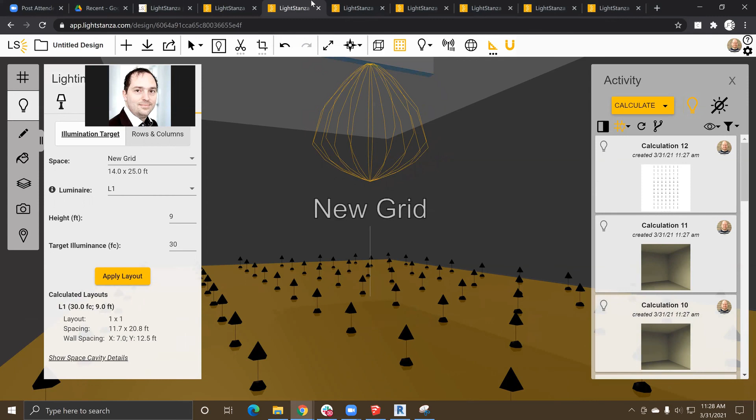Okay, so just about Lightstanza again - this is a problem with web-based software, you can have a lot of tabs open. But if you wanted to, you can just get a free trial. You don't have to pay any credit card, nothing. You could just try it out.